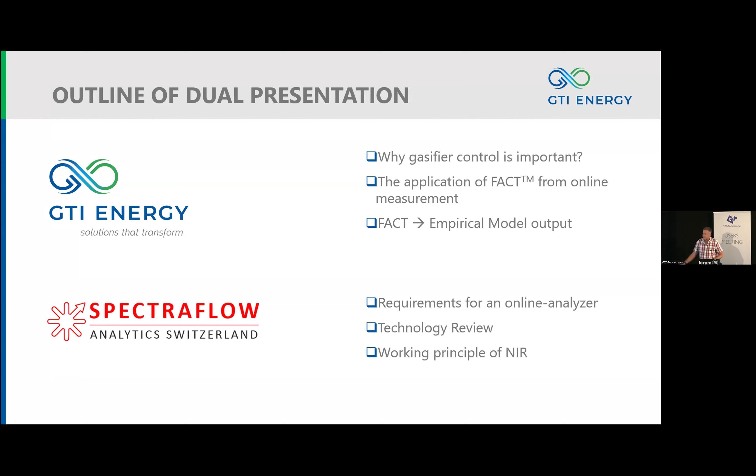The clever statisticians call it a trained surrogate model, but for me, it's an empirical model based on FactSage results, where the output from the online analyzer goes directly into the empirical model to change the temperature of the gasifier. I'm not going into SpectraFlow Analytics to show you that. It is in the presentation, which you can read through.

So what we did was a real-time installation from SpectraFlow Analytics before the gasifier, on the feed conveyor. Then a detailed statistical data gathering on the inorganics, a full analysis on all the details. But for statistical reasons, given the amount of data we need to build the statistical model, we focused on silica, alumina, calcium, iron, and sodium. Those 5 parameters were the drive behind developing the model, which I put into FactSage Equilib, for a fixed bed gasifier, and I will show you what happened where.

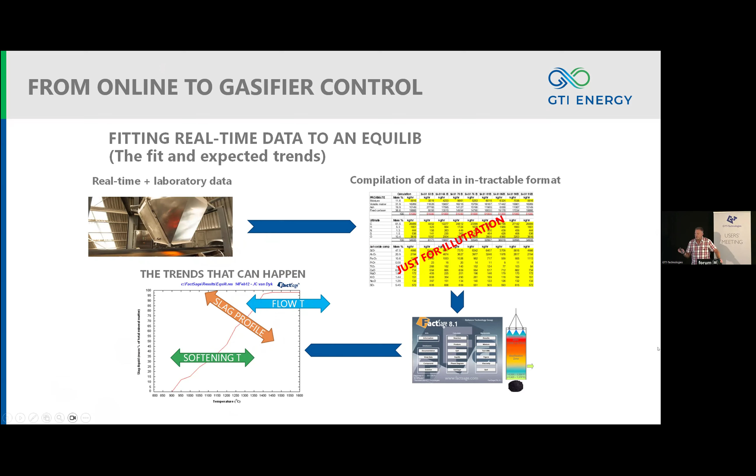On that slide there, all of you are familiar with slag liquid formation. We're running at a flow point temperature in entrained flow at the top part, fixed bed in the middle, but we also need to look at variation, because the gasifier cannot tolerate too much variation based on the silica and acid-base ratios. The value proposition, and we based this on a very small plant, a 1 megawatt plant.

And to summarize this slide, what will feed-forward control be of value? If the operator understands where to operate the gasifier, he can operate the gasifier so as not to slag down or foul the gasifier. If a gasifier is slagging up, for example a Sasol gasifier, it's 7 days out of operation. You need to dig it out from the top, open up the whole gasifier, and then start up again.

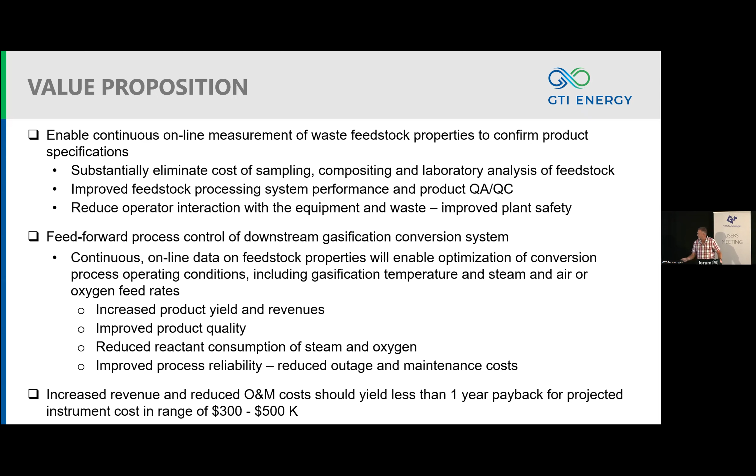So calculate the cost of one gasifier down. The payback on a system like this is minimal. Within 1 year, you have the payback on your instrument, your feed-forward control, and the analytical part conducting the work. Now, this is very important.

I have to stand still, but I like moving around as well, but I will not.

When you look at municipal solid waste, this is the grid that the gasifier will see.

If you can see white and blue, it's totally different things. With coal, you see black, and normally the variation is little. Yes, there are variations of calcium and silica, but not to the extent that you see colors like that. This is how different MSW is going to the gasifier on an hourly basis.

So what the upfront people conducted was scans on a grid and then getting outputs. It's very small, you don't have to be too concerned about that. But this is the variation on each grid that you see there. There you can see the variation on the analytical data. That analytical data is then going back to FactSage on the other side,

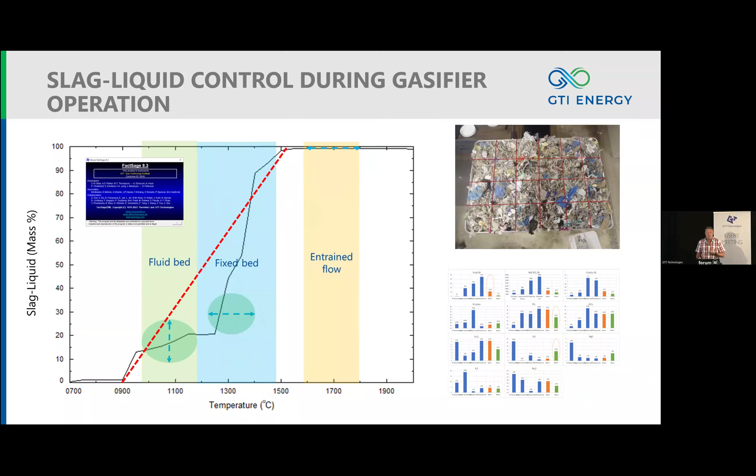where we need to operate in the fixed bed mode. We need to know exactly what the slag flow profile is for each block going into that gasifier. If you're outside, either higher or lower, then you change your oxygen to feed ratio. And that's what the operator needs to understand.

Going forward, in the old days, or in real time with coal, you have initial deformation temperature variation over time in short periods where the calcium variation is taking place. You also have a window of operation change with percentage up and down. If you change up and down inside the block, that's not the concern. The concern is if you go outside this block. And this is where you need to control your gasifier.

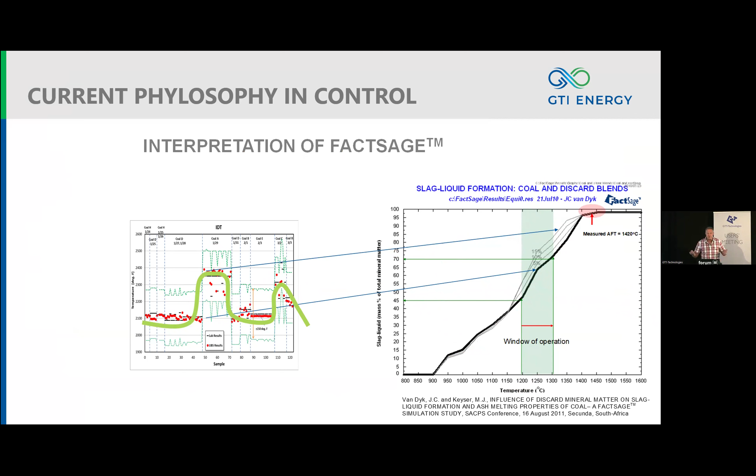I'm going to skip this. Let me do another two things. To minimize time, because running 122 times 5 FactSage runs takes a lot of time.

So from a statistical point of view, we said entrained flows run around the liquidus, the 100% slag point. Between the 50 and 25% is where the Lurgi gasifier must operate. So it's very important that we have those points between the 50% and 25% slag point. So from my FactSage output, I supplied the liquidus temperature of 25%, 50%, and 100% liquidus. That's my output that went into the statistical models.

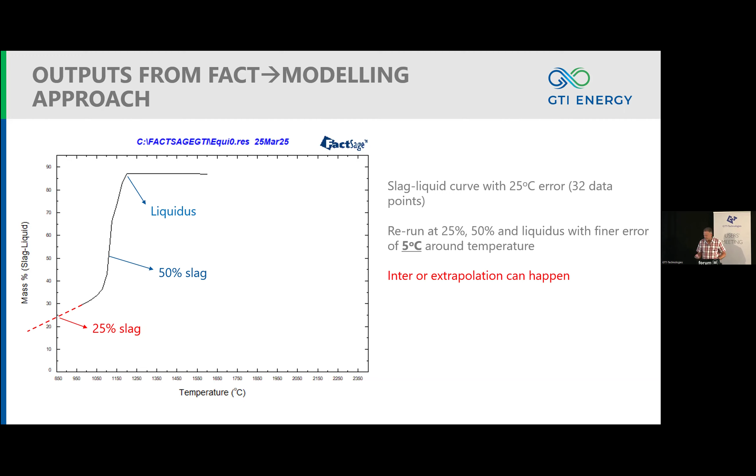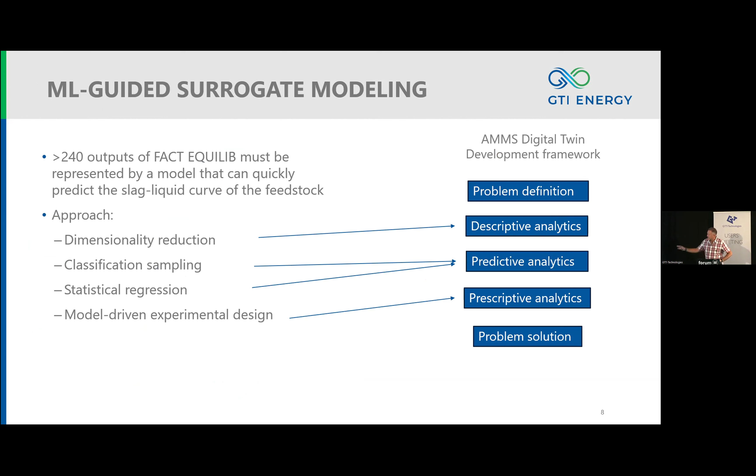And based on that, and the output from the online analyzer, a model at the back end of the gasifier was telling the operator how to change the oxygen to steam ratio. So the statistical approach was based on a neural network as well as a Gaussian approach. I did not do the statistical work. One of my colleagues handled that at the back end.

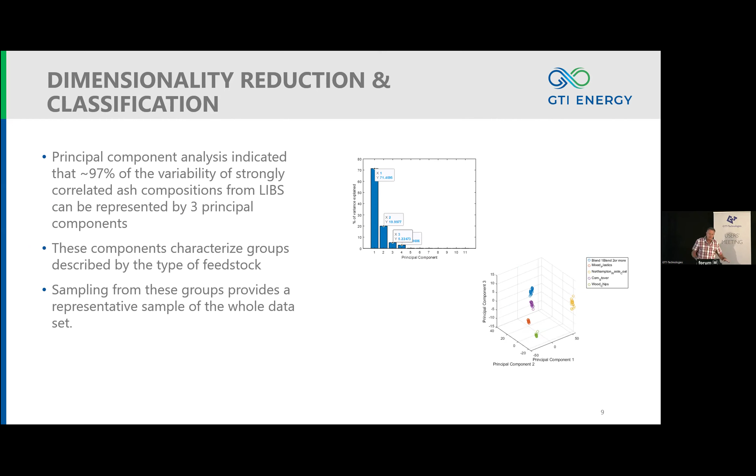The first approach we did was an iteration where we correlate the output from FactSage forward and backward in one iteration. If I can explain this: I did the FactSage run, the neural network predicts something, I went back to my FactSage model and ran it again and saw the correlation. After the first approach, the correlation was only around 85%.

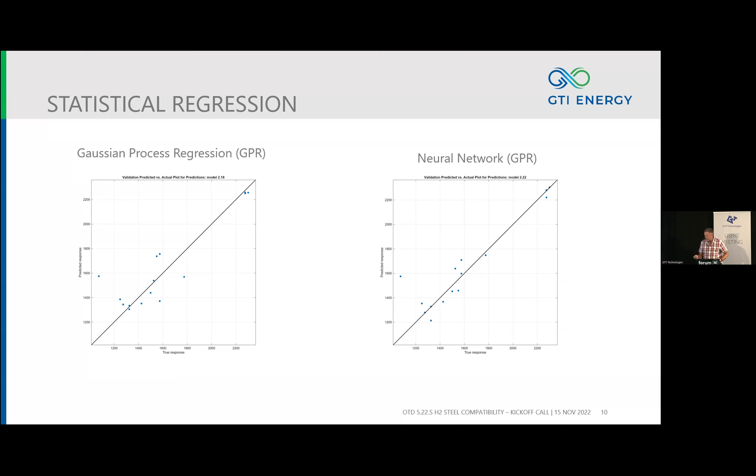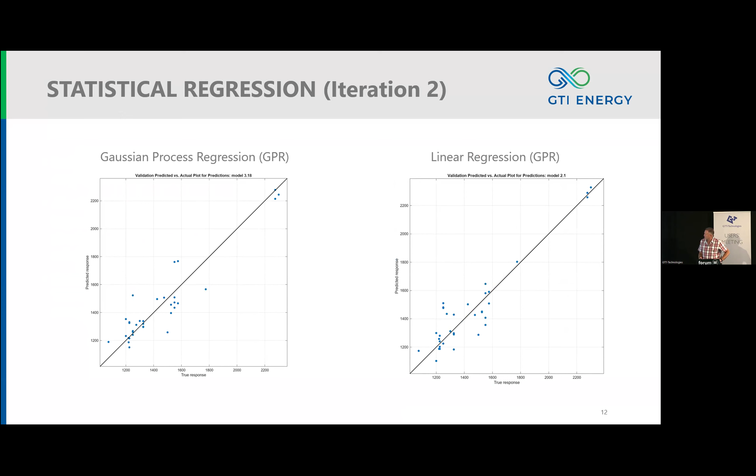We did a second iteration of data, doubled the amount of data points, and we came back to around a 94-95% correlation on the 5 elements that we selected for the gasifier. These are a couple of statistical things that I will skip. Guan, who did the statistical work behind that, did both linear regression and the Gaussian regression approach.

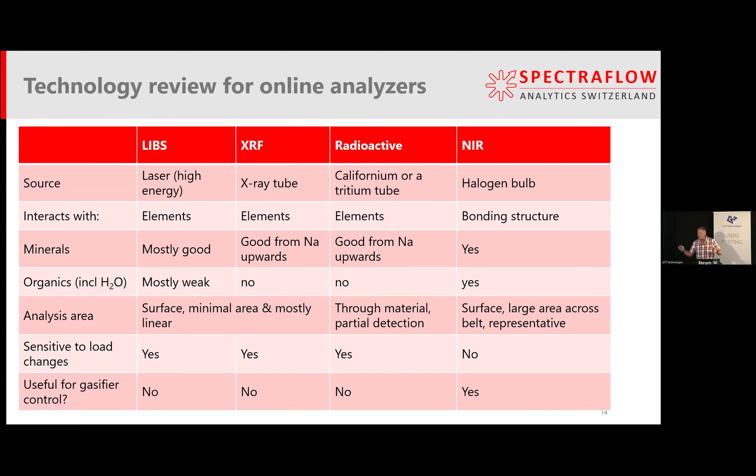I'm going to quickly scan through the SpectraFlow Analytics analyzer if you're interested in that. You get a number of online analyzer tools. Some of them are not very accurate for specific elements. We've selected the SpectraFlow tool, where the variation between the elements that we selected falls within the boundaries of our 5 elements.

The energy is absorbed. Every 7 seconds, there's a scan. Every minute, after about 9 scans, 1 data point is then sent back to the empirical model. So every minute, the gasifier operator can get a data point to operate the gasifier. We increased that to 15 minutes. So the operator will not change the gasifier operating conditions within 15 minutes.

So we may see a trend, and the reason for the 15 minutes is because it's a 1 ton per day unit. Within 15 minutes, the variation or the change in feedstock in the gasifier is small enough not to cause blocking up of the full gasifier.

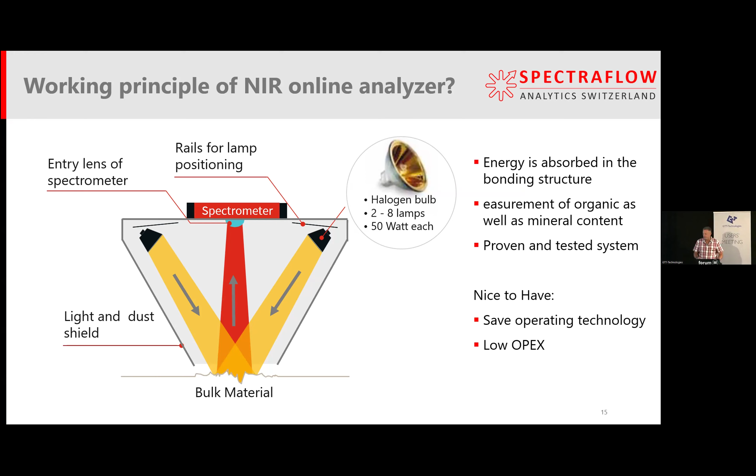A number of these plants, I'm going to skip that, a number of these plants are running in different industries. In single elements, platinum industries, cobalt extraction, cement industries. Well known in the cement industries. If you want to know more about this for your company site, I can gladly send the information to you. I'm going to stop here. The rest is really technical on SpectraFlow.